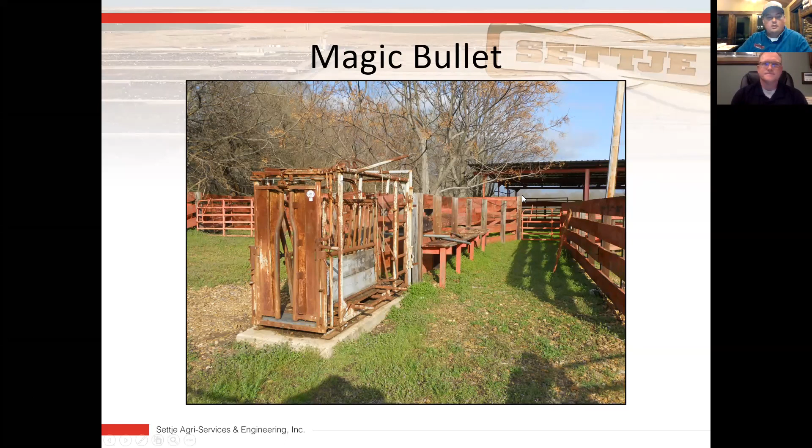So, hey, Jake, there was a Kevin, and I apologize if I mispronounce your last name, I think it's Kevin Hoagie. He asks, what chutes or alleyways are better, see-through sides or closed sides? Well, I'm super glad he asked, because I'll just advance the slide and we'll talk about it for Kevin, if that's all right with you.

So we get that a lot. What's the best chute? And again, this is maybe a politician's answer, but I'm not aware that there is a best one. There's certainly advantages to both systems. Dr. Kip's smirking. I think I probably have an opinion, but I'm not sure that I can just generally say that if you don't use a silencer chute, then your cattle aren't going to grow like that. It's just not realistic. So hopefully maybe that helps.

I think, yeah, what's appreciative about that answer, Jake, is that maybe Kevin's also asking about the louvers and those types of things, and this true solid or true open. I certainly have opinions, and I would always tell you that it really depends on the handlers that are chute side and their knowledge of the animals which they're working with, and their understanding of how to get one to go forward and how to get one to back up and so forth. Obviously, if you have that knowledge, then some open sides maybe not such a bad idea.

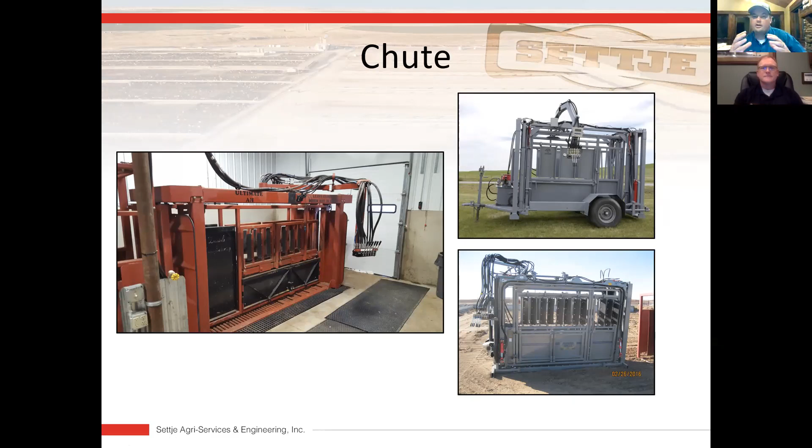Dr. Kipp was talking about the recessed chute. I think you can see my cursor, but this is a Daniel chute, and you can kind of tell here that instead of having that platform elevated that the cattle step up into, the concrete there is recessed so the feet sit down, and that's a sort of a continuous plane. So there is no step up or step down into that chute. That chute is really kind of one of four usual key pieces that we get lots of questions about. So that's kind of the main one.

I use the word funnel here. I'm not sure that's really the right word, but in order to get cattle into the chute, we've got to have some sort of system to take them from a large group to a smaller group to an individual animal. One of the ways that we do this is with a bud box and alleyways. We also use tubs. We can use bud tubs, which is a sort of a hybrid of those two systems. Again, there's some component that allows us to take those animals and direct them in the right direction.

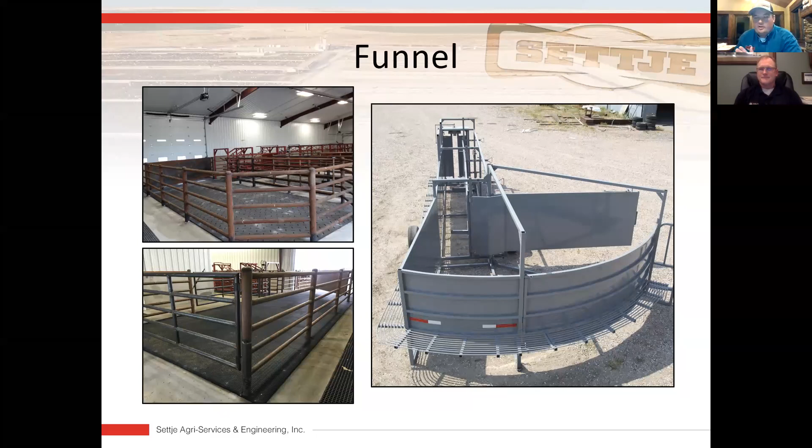I've got Brenda with a question here. Yes, go ahead. Hi, Brenda, you're unmuted. You can ask your question. I wonder if Brenda is using two technologies on us tonight. Why don't you move on and I'll see if I can get Brenda's question. Okay. Sounds good. Yeah, she lives in the middle of nowhere, so it's possible.

All right. So as we step further back, there's going to be some sort of network of pens, alleyways, gating, both to get cattle into our system and get cattle out of our system. And that can be a simple alleyway. Sometimes it's one large pen. Sometimes that's just a portable corral, right? I mean, it's accomplishing the same purpose there. But obviously lots of configurations, lots of setups to allow you to do different things, right?

There's some operations that do lots of sorting. There's some operations where they do maybe sort cows from calves or bulls from heifer calves, but that's a very limited piece of their operation. So their system is much simpler than somebody that's putting together large groups of cattle and sorting them eight different ways and the like. So that's a piece that we get lots of questions on and spend lots of time thinking about and thinking through.

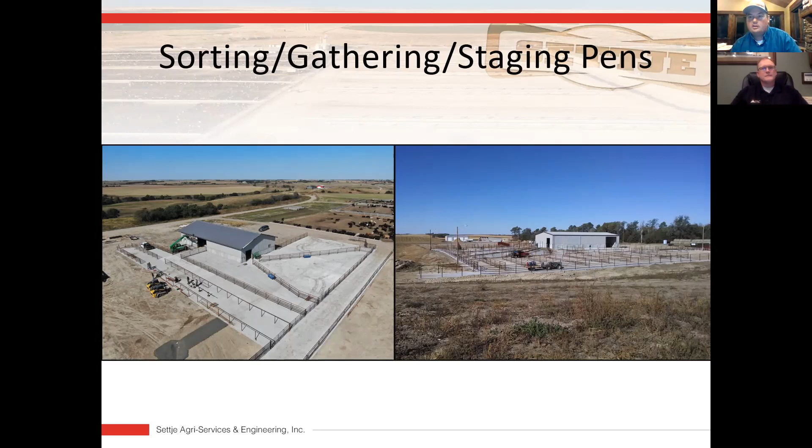And then the fourth thing that's usually a big topic of discussion is what do we do as far as shipping and receiving cattle, and what does that look like? So, Kevin's question earlier, we've got some loading chutes that are solid sided. I've got one that's for a stock trailer, right? There's plenty of operations that may rarely, if ever, load a semi, right? So let's think about what size trailers we are using and build our system to accommodate those. Not everybody's loading three semis at one time every day. It's just not the reality.

But there's concepts in that. Again, we're working in a bud box here to a loadout. So some staging pens. All the components are kind of the same. So staging or holding pens, sorting pens, some kind of mechanism or structure to funnel those animals down into that chute, and then a system to bring those back into your production setting.

Jake, Timothy Norrell has a question: how big does your bud box need to be depending on what you're working, cows or calves? So I'll let you correct me if I'm wrong here, but what I normally try to do is the size of my bud box is dictated as much by the length of my alleyway in front of it, because I always want to keep an animal in the chute, and I kind of want to have one waiting.

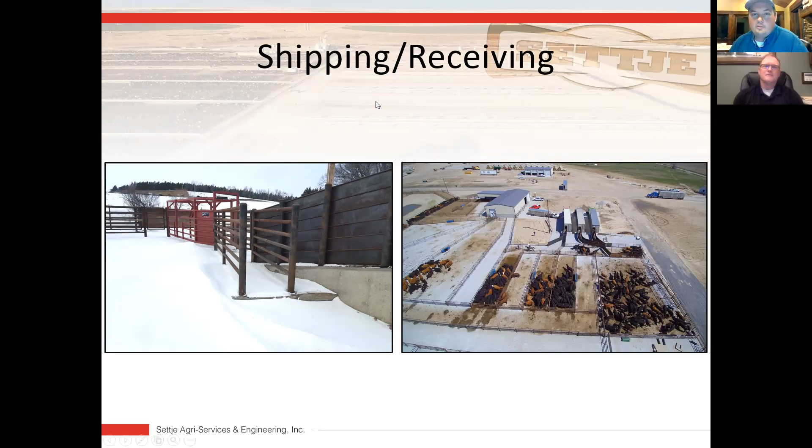Yeah, and Rex, just to allude to Jake's comment, and I think this is later in Jake's presentation here, if you do have even just a simple drawing or sketch of what you have, and as I always tell our young men and women at the feed yards or on the ranch, if they're really good at taking pictures and Snapchatting or texting those, maybe just sketch that out on a napkin or a piece of paper and send it to either Jake or I or both. And maybe there's an opportunity to help you on that.

For sure. It also segues perfectly into one of the next things I wanted to talk about, at least briefly. Again, thank you for all your questions. Appreciate you tuning in. And that's a little bit of this design and planning process that we get into, whether that's an existing facility that we're considering modifications to, or a brand new facility and we get to start from scratch with something new.

That process starts mentally, right? You know your operation, you know your animals, you know your site, and so you've thought about it hundreds and thousands of times. You've had good days working cattle and bad days working cattle, and so sometimes it's hard to think through that, and just having someone to think through it with or provide a different perspective.

As we're talking through this whole design process, one of the other things I always share is it's an iterative process, right? You never get it right the first time, but it's a lot easier to go through that process on paper, in your head, on the computer, than when we've got most of the posts set and these gates don't swing the right way. It's a lot harder to fix that than when they're just lines and squares on the paper.

So our process is really, that first step is to get you thinking. And the second step is to get those ideas on paper and start laying it out.

And okay, our feed yard, we have 150 head pens and we have 200 head pens, and we usually work a pen at a time. And so our staging pens need to be a certain size, or maybe we want to be able to work 2 pens at a time.

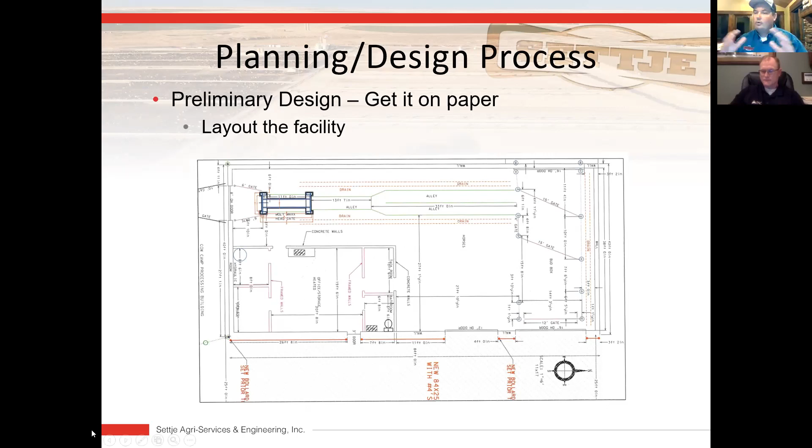And we just start kind of really creating the puzzle pieces, back to the 4 main components. So that chute, that crowding area, the staging pens, and a loadout. And we just sort of say, okay, what do we want these pieces to look like? And then it really is a puzzle of changing that configuration and moving them around and getting them sort of customized to a point where we like how the puzzle fits together. It's complete.

So from there, with our customers, then we'll take it into this final design phase. And so now we've sort of established what it is we want to do, and this is really how to make it work. And the level of detail that's needed obviously varies widely depending on your needs, but it can be as detailed as, where does the light switch go? Where does every water line run? Where does every drain line run? How much rebar should be in the footing for this building? How many trusses do we have?

Here's one, how does the overhead door track interact with the post for my bud box? Because if I put that post in before I pour my floor, and a guy comes to put on the overhead door and that track doesn't go on there, we've got some problems, because we're just going to get ready to jackhammer out a floor. So basically figuring out all those details, the things engineers like that most people are like, yeah, we'll just do it. Spending some time there is certainly a savings over jackhammering a floor out. So that has happened before.

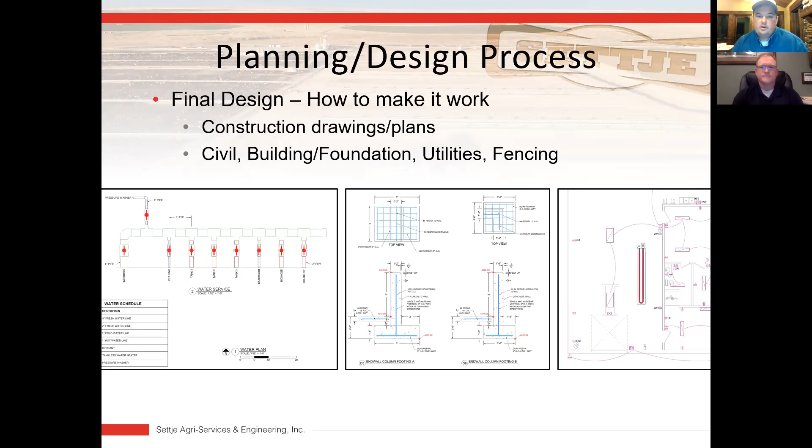So now we've figured out here how to make this work, and really where our customers have seen the benefit of that planning process is in the construction process. And what I mean by that is time and time again, whether the operation is managing that construction themselves or they're hiring it done, the better quality of the plans you have to give to a contractor, the more quality bid you're going to get back in return.

When you've got it line-itemed out to every nut and bolt that goes into that building, or every gate or every piece of equipment, those contractors and the people that are going to help you put this together are so much more comfortable in giving you a firm number of how many dollars it's going to cost to build this, instead of saying, well, I want to build some pens over here, we're thinking about 30 by 100, let's just bring a load of continuous fencing over and we'll just get started and see how it goes. That's just tough to do accurately.

And on big projects where there's a financial component, you don't want to just hand out checks in your business. So you need to have a good plan so you can have a good understanding of what kind of costs. And then it also allows you to make modifications, right? So this design is iterative. Very seldom do we build what we start with from a budget standpoint, right?

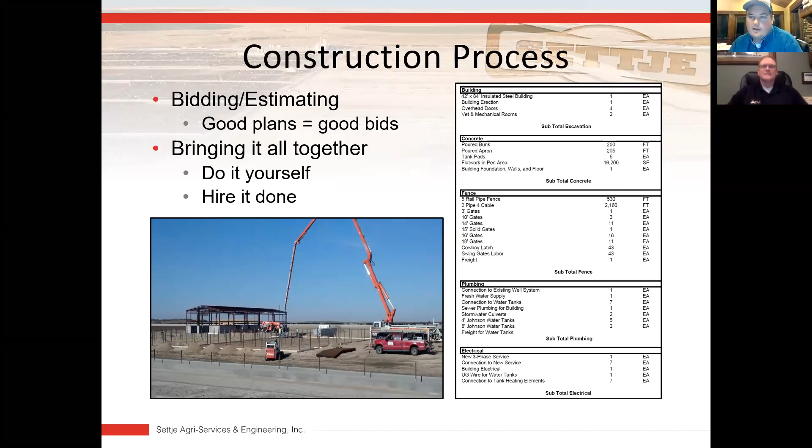So I've got a few pictures that I want to share with you. I know we're already over time. If you're busy and you need to leave, I thank you for joining us. But until somebody kicks us out, you guys can't talk, so you can't boo us. So we're just going to keep rolling through this a little bit.

One tool that's been really popular with our customers is taking that 2D sheet, which is sometimes hard to read. If you're not in a field where you review plans, it's sometimes just intimidating to look at that sheet and say, I don't understand what this means. And so as the technology and software has advanced, these 3D renderings have been super popular because it gives you an opportunity to see what this is going to look like before it happens.

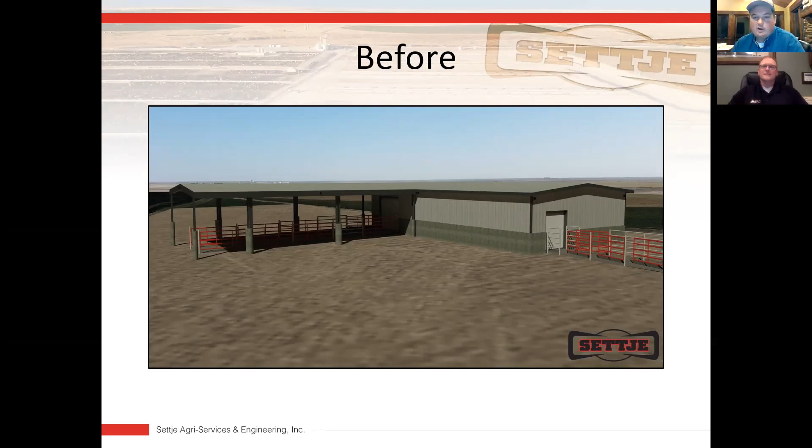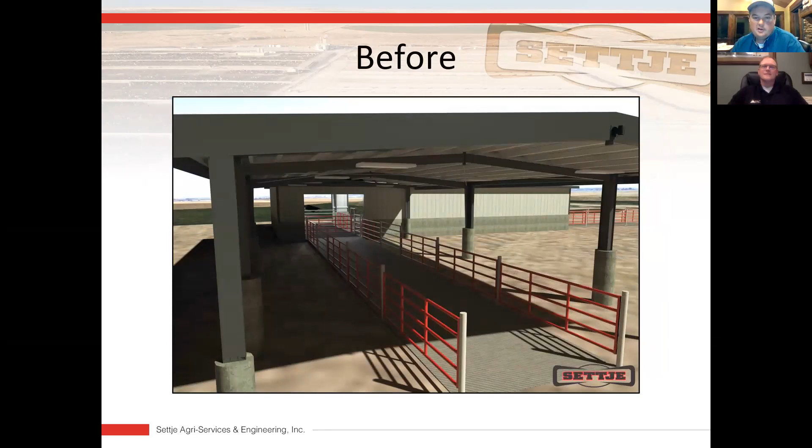And so this is a rendering we did last fall, and that's the same facility on Tuesday. This is a facility down in the Texas Panhandle. So different perspective. Again, this was taken this week. And then here's from inside of the building.

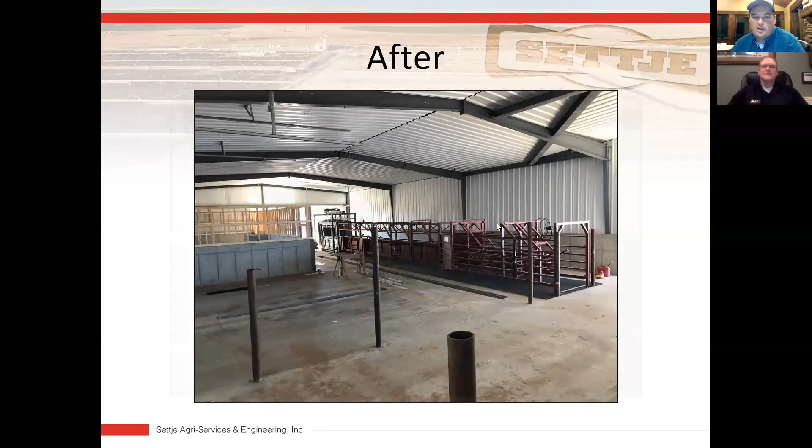And they've got the Daniels chute, bud box, not completed. Obviously, there's a vet room and office space, finished space in here. They're starting to frame on that. So that's the rendering, and that's what it looks like. And it's pretty cool when a project can come together like that. This is also sort of the before and after view, but this is a little bit different perspective.

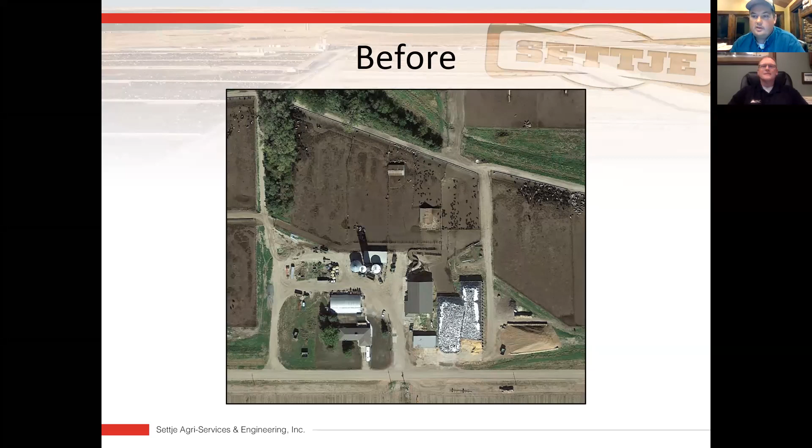Customer had a working facility that they really liked. This is a tub and curved alleyway setup. They loved it. It was a good match for them. But it really sucked to use it in inclement weather because it's not covered and there wasn't much concrete poured around it. The pens were always muddy around it. They liked the equipment they had and they didn't like anything else about it.

So we're in the process of building a building over here. There's a bunch of paving that got done. We redid this alleyway, all new fencing, sort pens, staging pens, and completely revamped that.

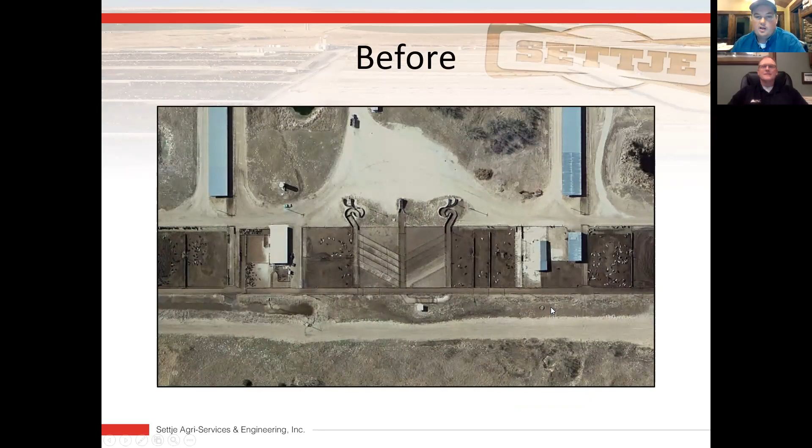Here's another one. This is sort of the before, obviously a larger setup where they've got the ability to load several trucks at a time. And here's sort of the after. So we kept that functionality, relocated it and condensed it in a way that allowed us to put a new processing barn, staging pens, bud box, alleyway, chute, and some sorting pens outside.

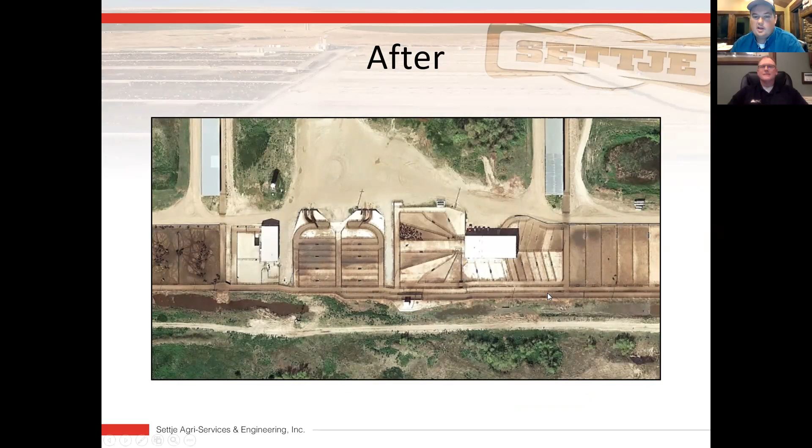So here's one. The other thing that we experienced too, and I talked a little bit about it, is what opportunities does a new facility or a modified facility allow your operation, big or small?

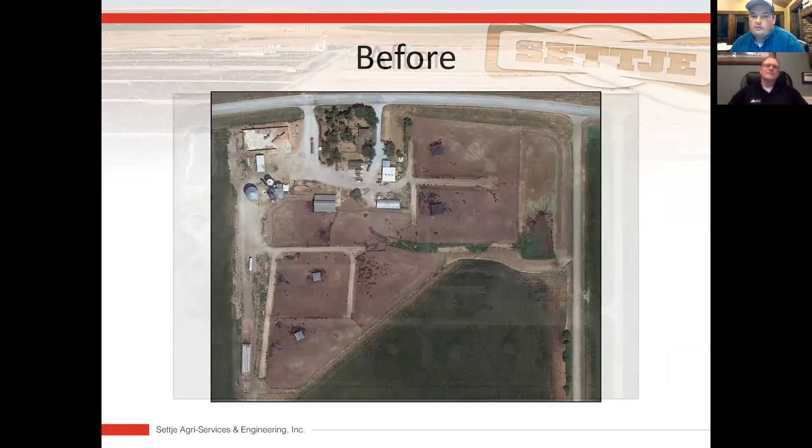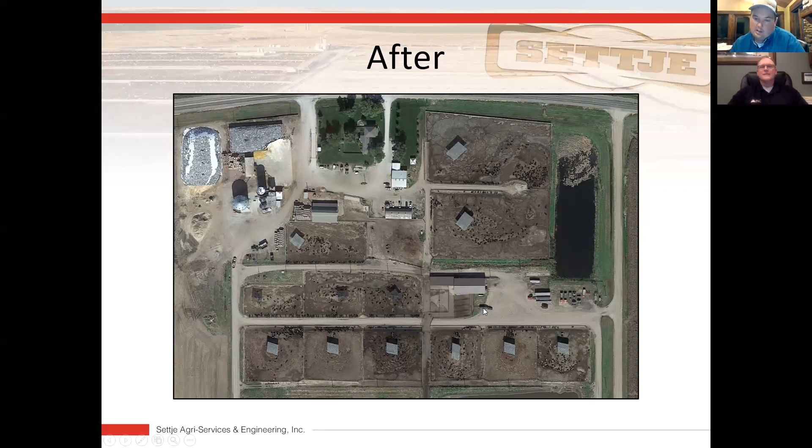This is a small feed yard that, as part of an expansion to the feed yard, knew that they had to upgrade their facilities. And so this west end is kind of a covered, couple of small sick pens, and they built a new processing barn. This one actually has one bud box, but there's two alleyways. So as you go west, you go to the chute, and as you go east, you go to the loadout. And so semis actually back up to the building, and they've got their stock trailer parked there as well right now.

Just as we kind of bring this thing to a close, and then I think there's a question in here, and we'll take any more that you guys come up with. The other thing is, no matter how nice your facility is the first day, it's gonna have wear and tear on things, and the better we can do designing in features that allow you to take care of it. I can't think of anybody that I know that would buy a new car and never wash it. If you spend that kind of money and make that kind of investment, it only makes sense to take care and protect that investment. And so this is one feature that I just wanted to highlight that is super popular.

Our experience has been that the easier you make it for the people to clean the barn, the cleaner the barn stays. And so the way we've done that is we've integrated a drain system into the facility. It's a little hard to see because of the brightness through the door there, but this is the area the chute sits, and it's that same area that we talked about, recessing that chute so it's zero entry. We also basically create a waste pit underneath of it. Obviously, if there's a chute sitting over the top of it, you can't get under there to clean it out.

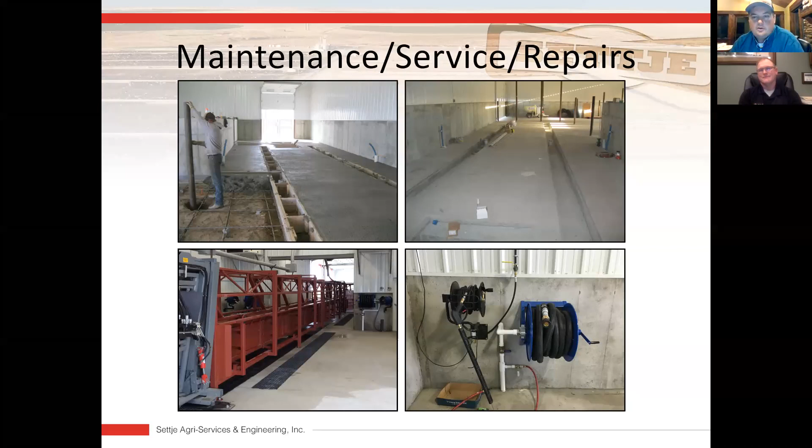Yeah, Cole, I completely understand what you're saying. I get the privilege every day of getting to work with people on these concepts, and in fact, I had a guy tell me just the other day, and he owns the yard, that he understands the entire concept. However, what's difficult for him is he does not see the same things that I see in terms of how I respond or how I interact with the animal. And he acknowledged that because of what I can see and anticipate, it tends to always put me in a better position and in a better outcome.

And as he says, some of us, we like the lines, we understand the lines, but we just don't always know how to read the body language that we're given. And that's what makes these concepts sometimes a little bit more difficult, because you really are asking people to interact and read body language without verbal communication. It'd be like Jake giving this presentation tonight without being able to talk.

It would have went a lot faster. Yeah, it would have been a lot shorter too. I keep glancing at the clock and realize that we've taken up a lot of your time tonight. And I sure appreciate those of you that have stuck around with us here as we're getting towards the end.